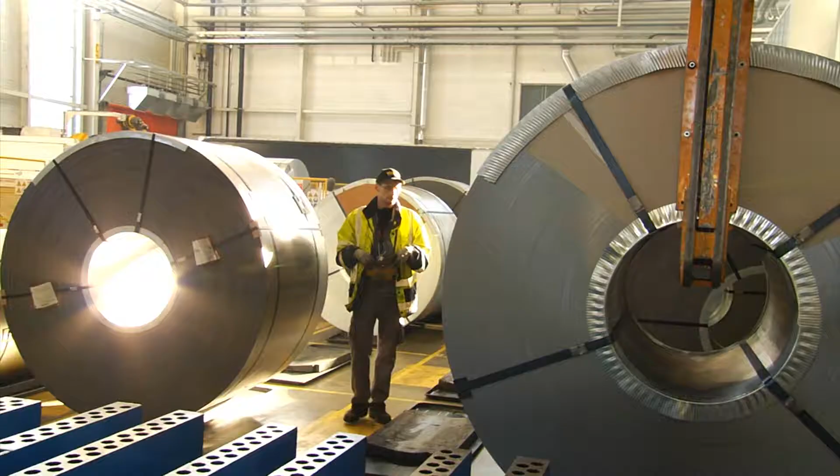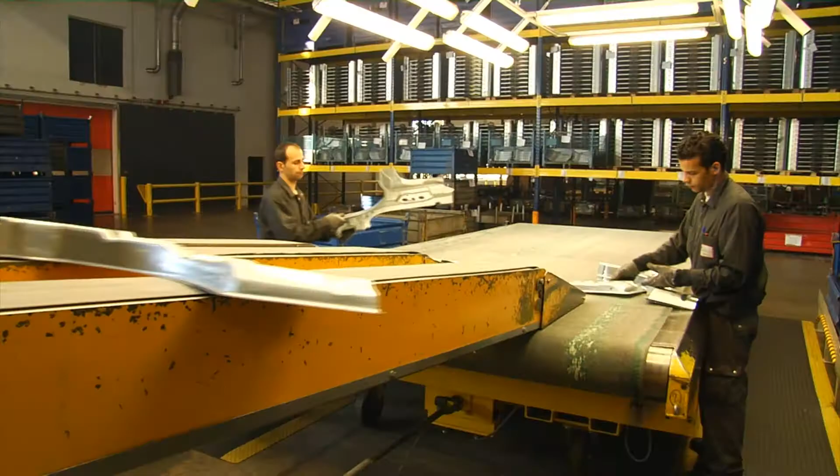Magna Lorraine Emboutissage belongs to the Canadian group Magna International. With locations in 26 countries, the group employs 107,000 people in 360 manufacturing, product development, engineering and sales centers. With a turnover of nearly 18.6 billion euros, Magna International is one of the world's premier automotive equipment manufacturers.

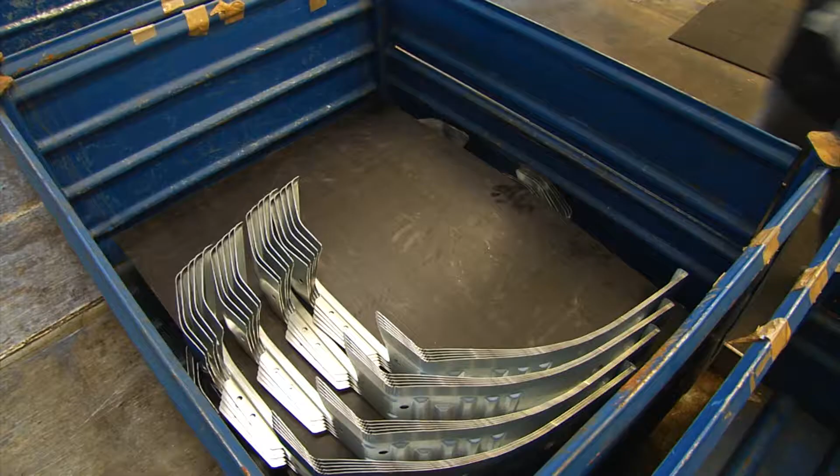The most diversified automobile equipment supplier, Magna designs, develops and builds systems, elements, modules and state-of-the-art automobile components, as well as assembles complete vehicles.

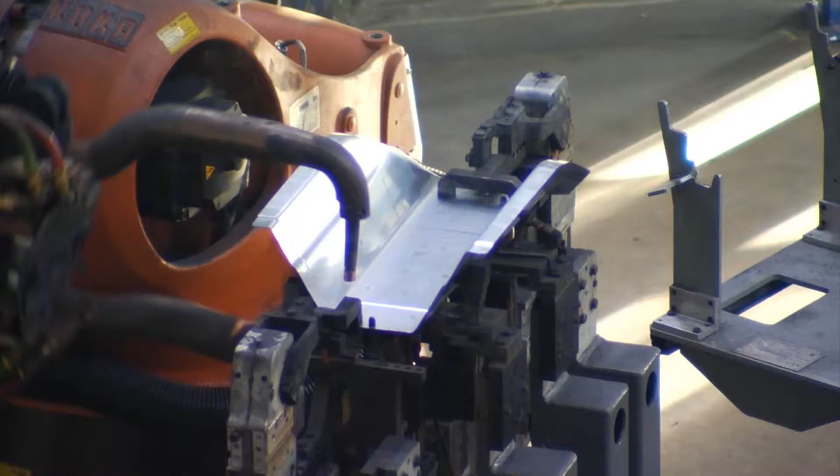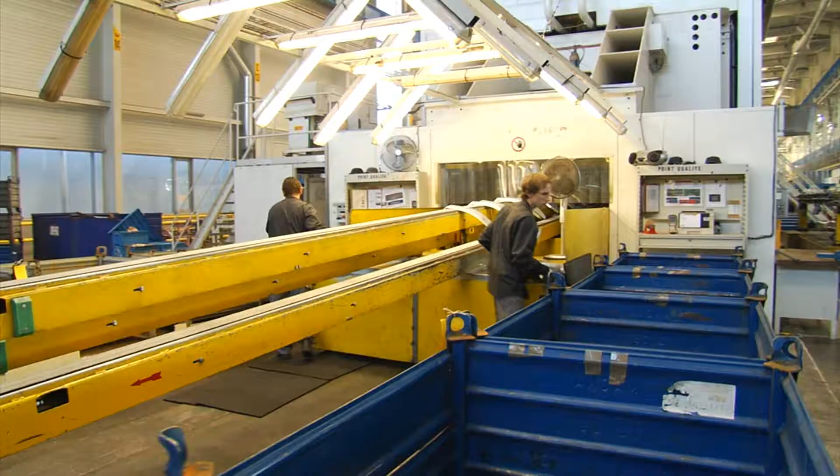Magna Lorraine Emboutissage is located in the Henriville megazone and benefits from a strategic geographical position in the heart of Europe, with a high concentration of automobile manufacturers.

The factory began its production of stamped steel sheets for the car industry in 2005. Since then, its customer base has diversified, and Magna Lorraine has developed its range of products to export to Eastern Europe.

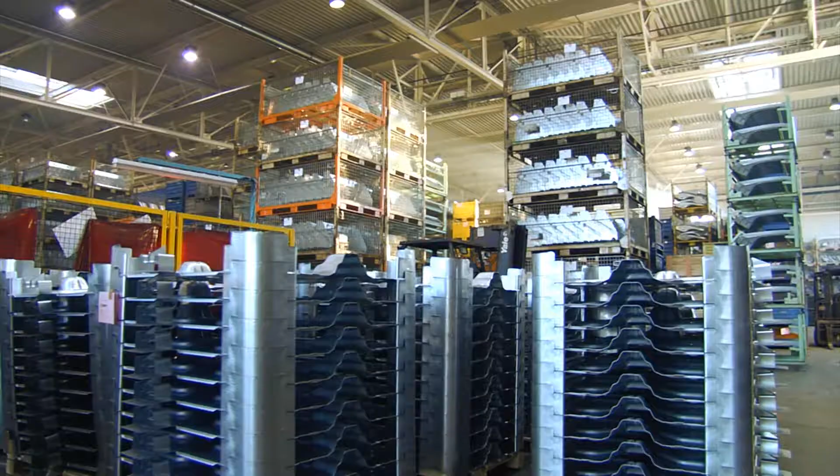Production has continually increased, and its turnover progresses year over year. Magna Lorraine Emboutissage has broadened its activity with the production of non-automotive products, such as steel pallets for plastic containers.

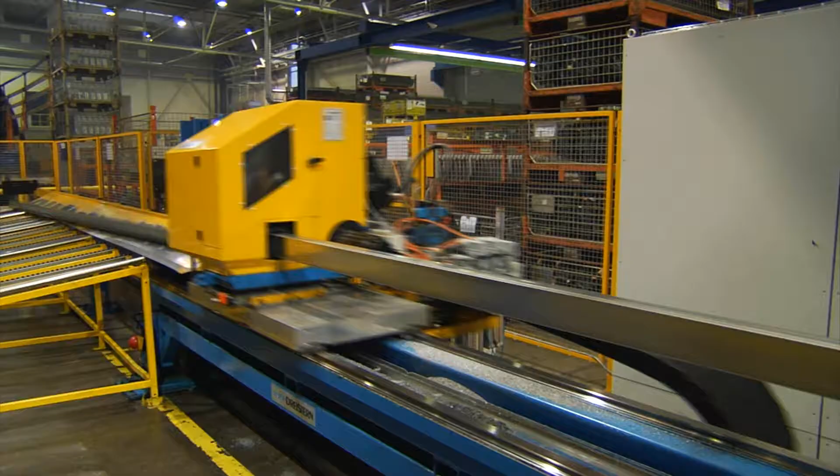Production is organized around 3 presses, a trial press, plus a new generation profiling line. In 2011, the factory entered the solar energy market and beat new records.

For us, the know-how is practically the same, bearing in mind that the automotive domain is a technically and globally very demanding domain with a lot of commitment. Those who can do more can do less.

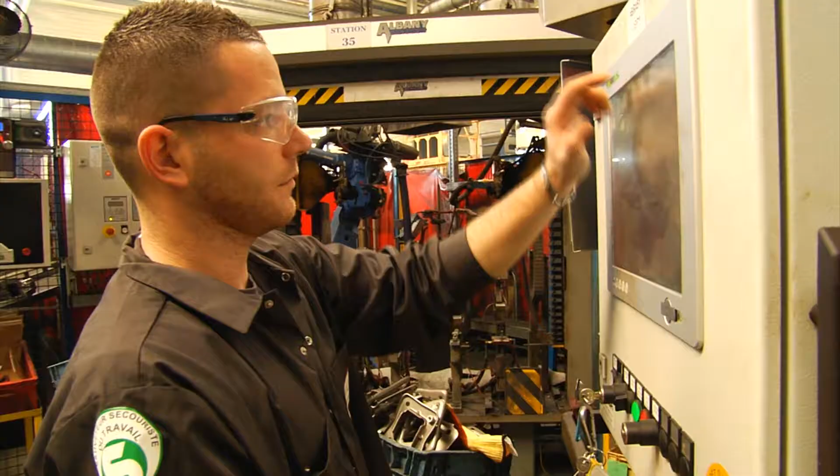With its 180 employees and expertise in meeting the high standards of the automobile industry, Magna Lorraine Emboutissage has put this knowledge and rigor into serving the solar energy market.

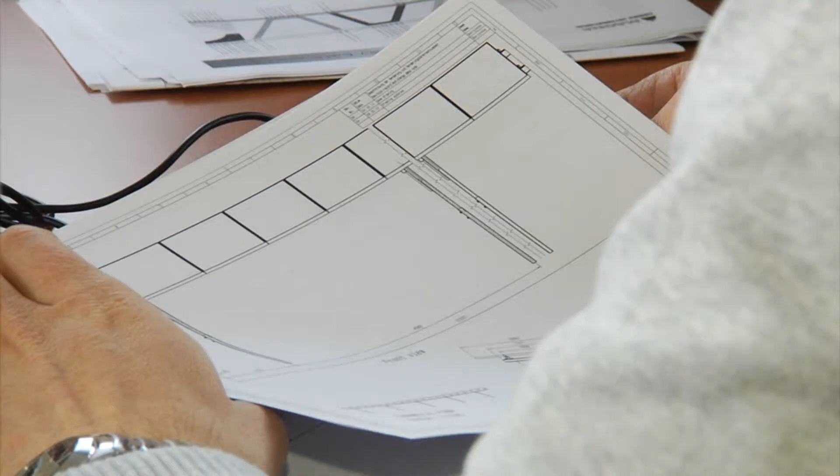For each tender, we develop a concept. We consider the geographical localization from which will depend geological criteria of the ground, criteria of snow and wind. All this allows us to develop a concept. At this step, we make calculations to validate the concept.

Complementary test benches are possibly organized. Everything is made in about 2 weeks. It allows us to develop a really optimized concept for each project.

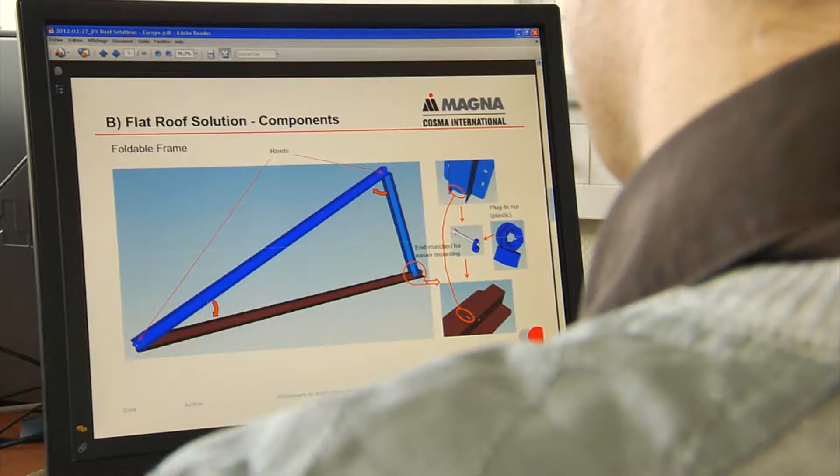In pre-development, the Magna engineers have been working on a roof system and 15 by 8 meter solar trackers.

Magna Lorraine Emboutissage can serve the needs of small or large solar field construction sites all over the world, with various table configurations ranging from 1 to 5 rows with 1 or 2-legged supports.

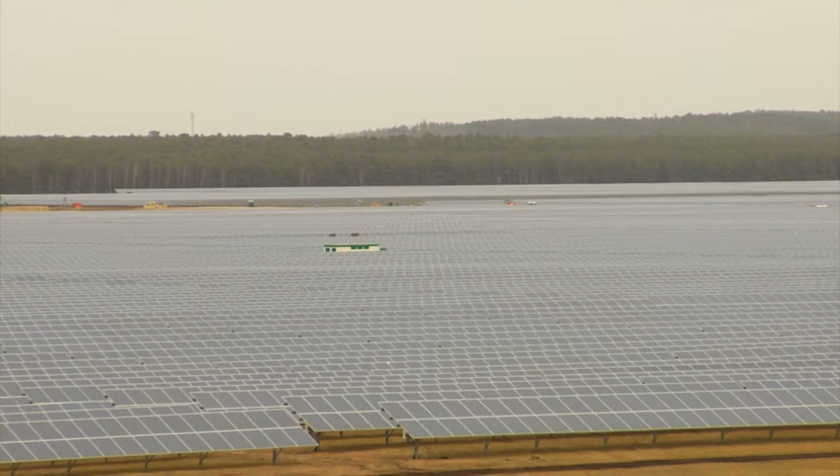While the competition primarily offers only very expensive aluminum structures, Magna innovates and proposes a patented, easy-to-build concept which is economically more competitive with its 100% steel profile and a 20-year guarantee.

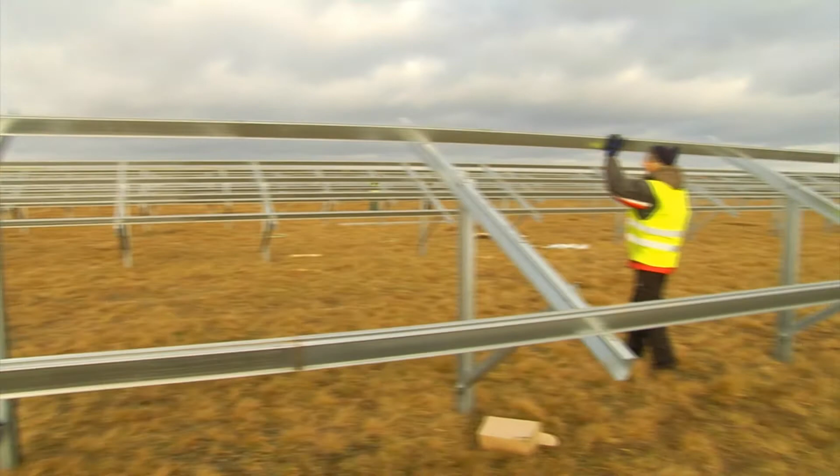The distinctive characteristic of this crimping is it's exempt from any weld, completely closed 100% steel profile that resists the required 20 years guarantee in the solar domain.

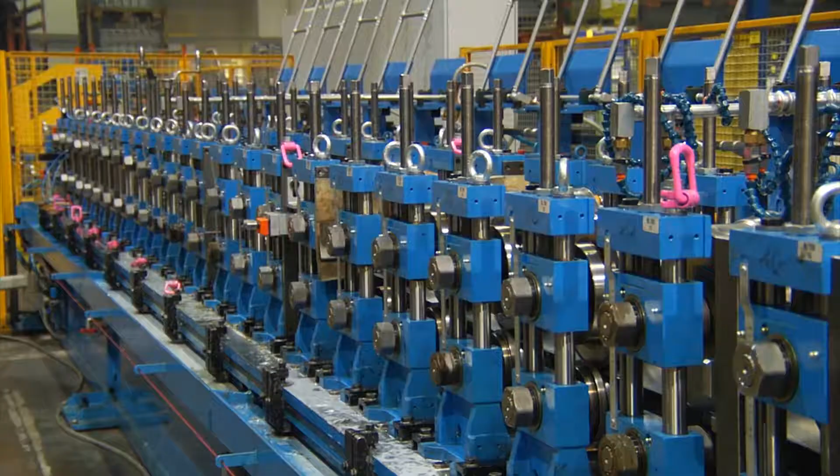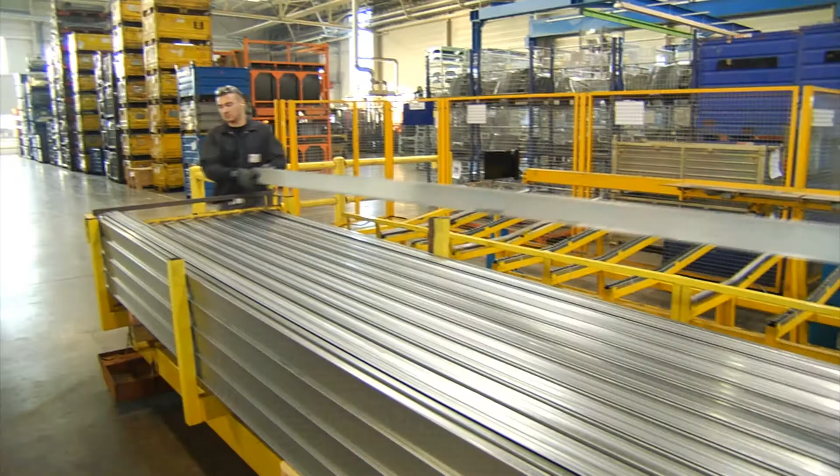The latest generation profiling line produces the elements for the tables which support the photovoltaic panels. The Henriville site has enough production capacity to supply profiles required for 150 megawatts per month and keeps a stock of approximately 20 megawatts at all times.

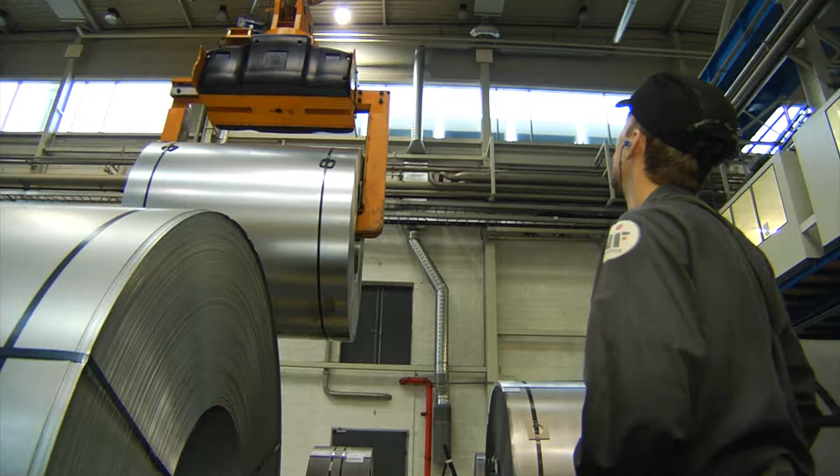Thanks to the automotive sector, the purchasing power of the group is 450,000 tons of steel per year. This makes Magna Lorraine very competitive in terms of raw materials delivery, different varieties of steel, and pricing, and allows them to obtain the biggest markets in the European solar field while respecting very competitive deadlines.

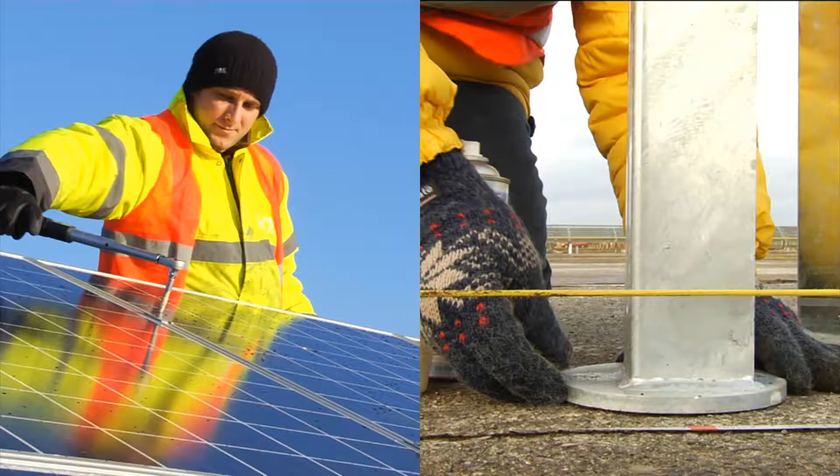In early 2011, the first solar field of 30 megawatts was completed in only 6 weeks. Another 91 megawatt project was launched in only 3 days. About 8,000 tons of steel were used for the manufacture of the 500,000 elements.

Put end to end, the nearly 1,500 kilometers of profiles represents 1.5 times the width of France. This project was completed in a record time of 8 weeks.

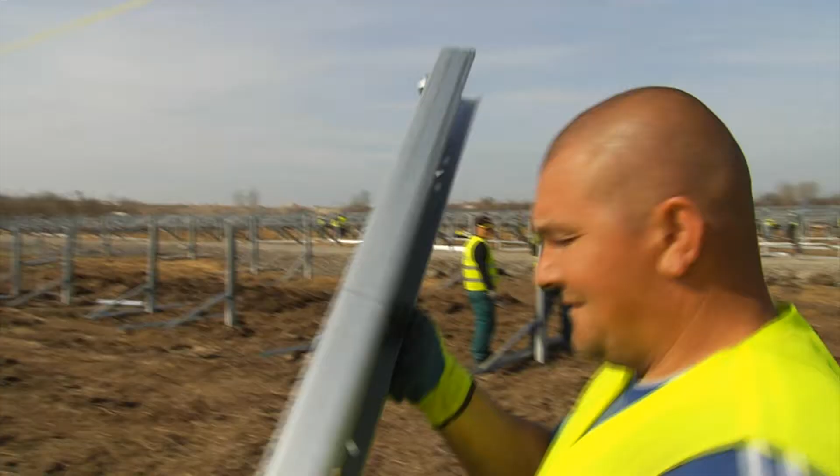Magna Lorraine expertise is not limited to the conception and production of the structure, but also extends to the assembly and installation of the photovoltaic modules. Electric connections and the construction of fences can also be supplied as options.

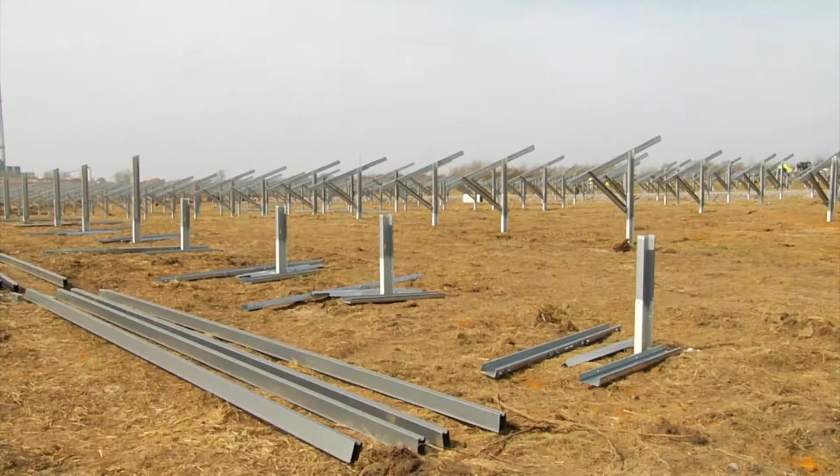On the construction site, assembly is simple and fast. It takes only 1 hour.

Respecting deadlines, quantities, and cost is the daily challenge of Magna Lorraine Emboutissage. As in the automotive environment, projects are managed with important planning processes, human resources management, and qualitative follow-up of the products delivered and built on the construction site.

We come from the car industry. The car industry is very drastic in terms of quality level, and we have exactly the same goals as the ones at the factory: the zero defect philosophy and the 100% control habits of work.

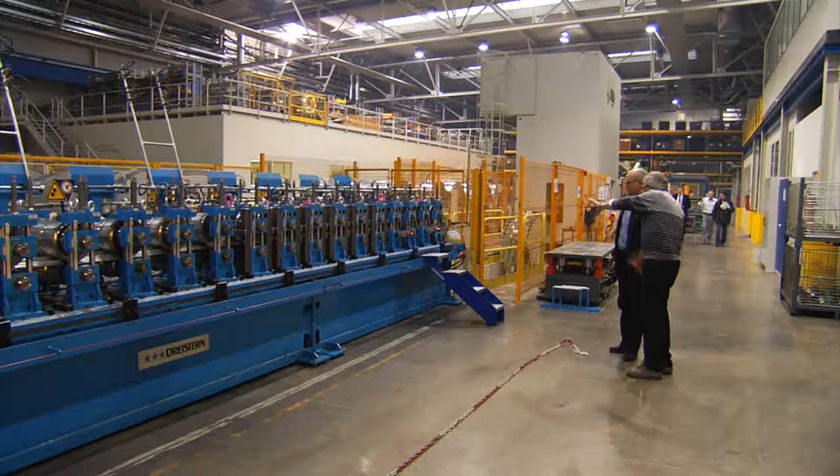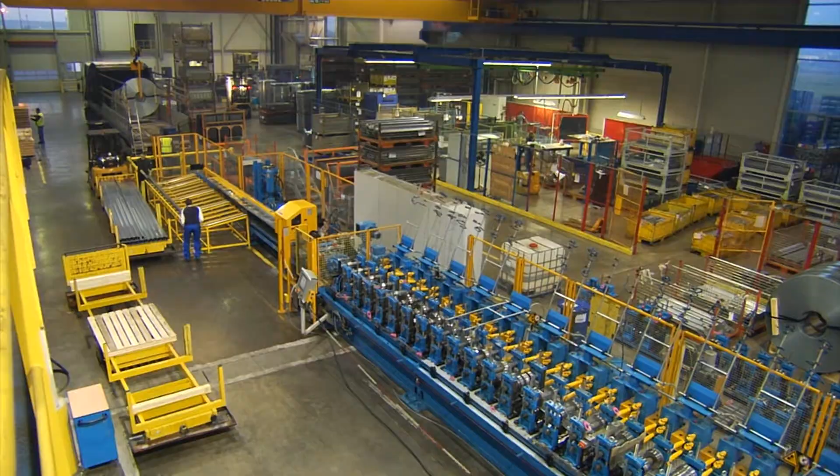Using 100% steel, which is 30% cheaper than aluminum, a simple, easy-to-build concept, and offering a 20-year guarantee, the company follows its watchword: to do what the others aren't able to do. Most importantly, Magna Lorraine Emboutissage goes where others do not, and always stays one step ahead of its competition.